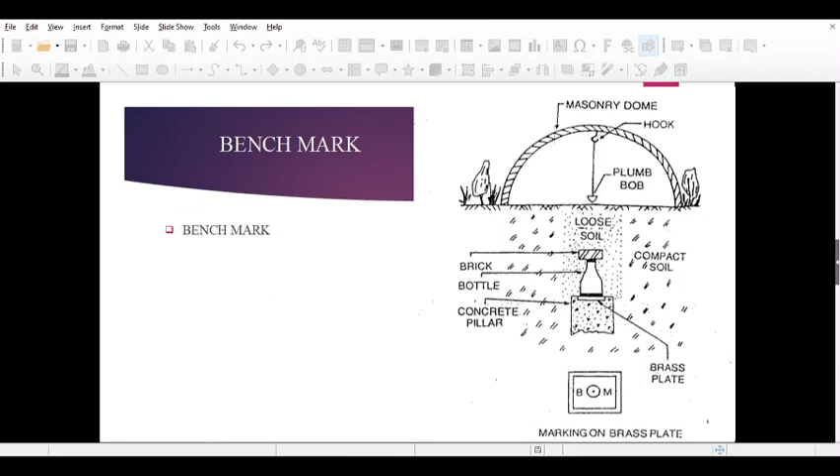You can see here, generally differential leveling is used for vertical control. Generally, the maximum closing error is limited to 24 times the length of the circuit in kilometers to the power half. A primary level route is first established, then a secondary level route is tied to the primary route. The secondary level route normally follows the traverse lines, and the traverse stations can be used as benchmarks.

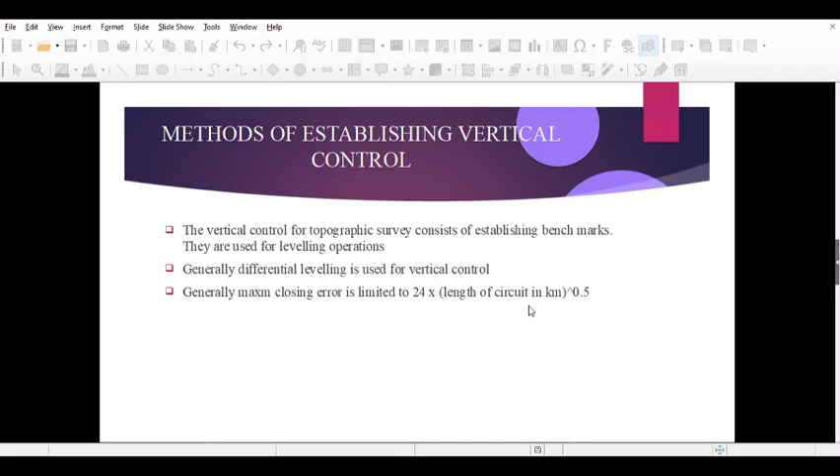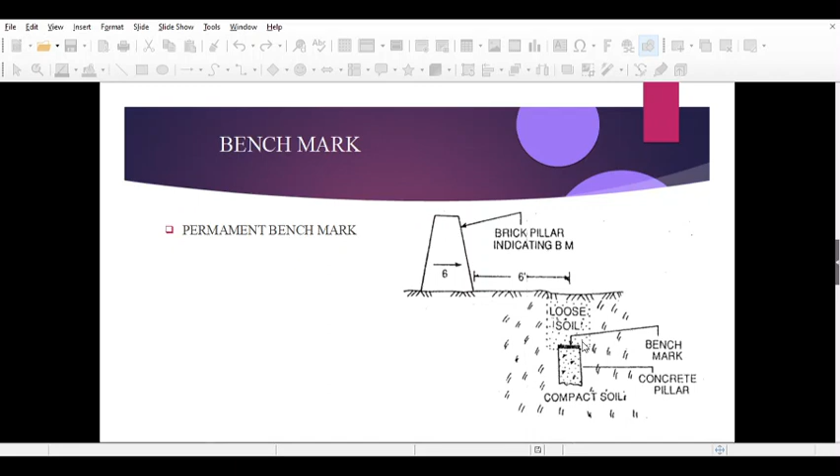Number three is the arbitrary benchmark. Generally, when the RL of some fixed points is assumed, they are termed arbitrary benchmarks. Generally, arbitrary benchmarks are adopted in small survey operations when only the undulation of the ground surface is required to be determined. That means the arbitrary benchmark is adopted for measuring the undulation of the ground surface in small survey operations.

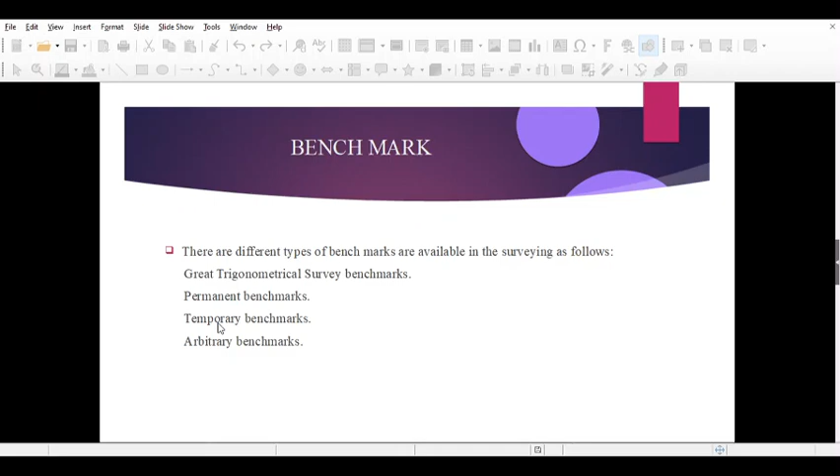At this point, a foresight is taken from one setting and a backsight is taken from the next setting. FS is known as foresight, BS means backsight. Now what is a backsight? This is the first staff reading taken in any setup of the instrument after leveling has been perfectly done. Now what is a foresight? It is the last staff reading in any setup of the instrument and indicates the shifting of the instrument.

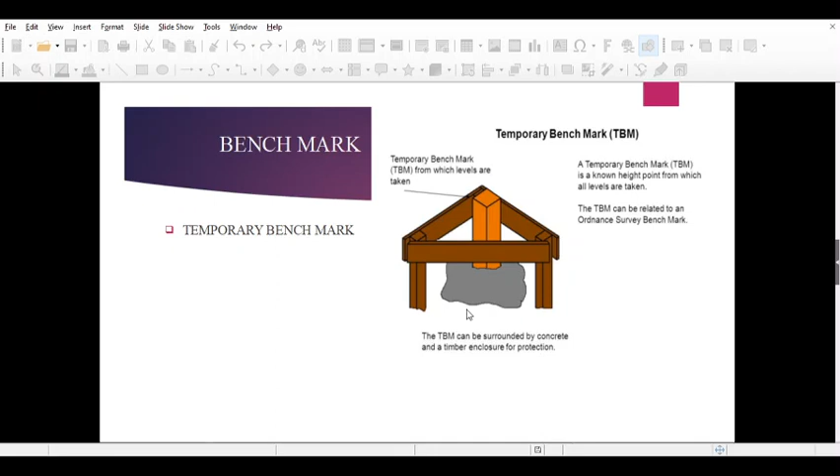Now here is TBM1. Now what is TBM? TBM means, let's see the figure. Here TBM means temporary benchmark. Let's see the figure of benchmark. Here is temporary benchmark. When the benchmarks are established temporarily at the ends of a day's work, it is known as temporary benchmark. Okay.

Now, after discussing differential leveling, you have to know what is leveling. What is leveling? Leveling is nothing but the art of determining the relative heights of different points on the Earth's surface or below the Earth's surface. The leveling deals with measurements in the vertical plane.

Now, what is horizontal line in this context? Any line lying on the horizontal plane is said to be a horizontal line. It is a straight line and tangential to the level line. Okay, this is level line and horizontal line is tangential to the level line.

Now, what is level line? That means this line. Level line is any line lying on a level surface. This line is normal to the plumb line, which is the direction of gravity at all points.

And what is this? This is known as vertical line. The direction indicated by a plumb line or the direction of gravity is known as vertical line. This line is perpendicular to the horizontal line. Horizontal line and vertical line are at 90 degrees to each other, that means they are at right angles.

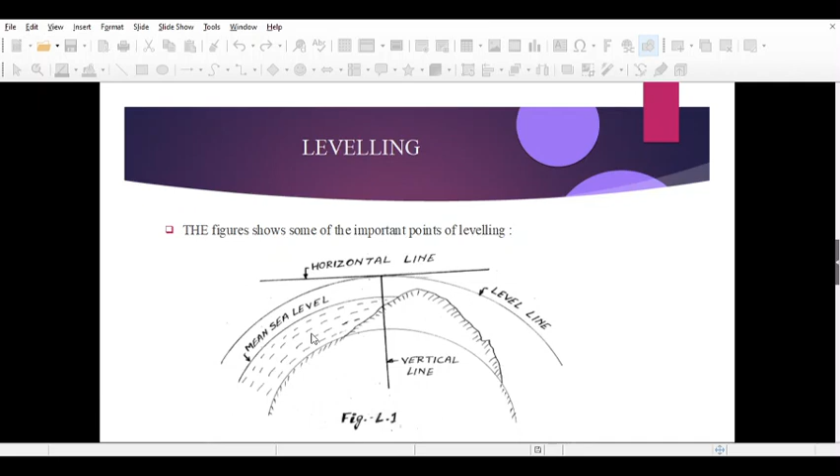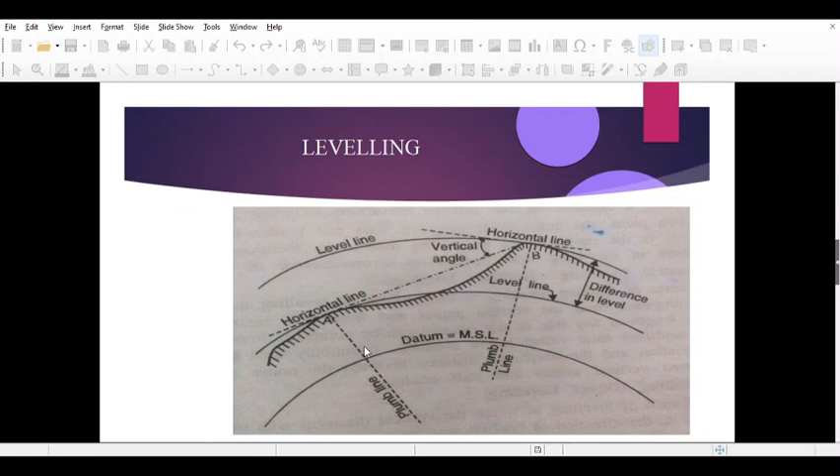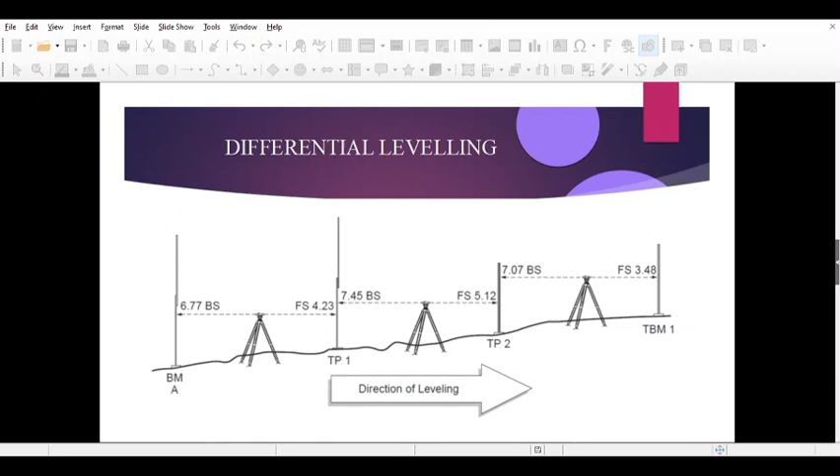Now, while you are doing differential leveling or any leveling, there are some errors which can affect the leveling work, like curvature error, refraction error, combined error. So we have to do the corrections required in leveling. Let's discuss the curvature error.

For long sights, the curvature of Earth affects the staff readings. The line of sight AB is horizontal, and the level line is curved. Here AC is the level line, curved and parallel to the mean spheroidal surface of the Earth. The vertical distance between the line of sight AB and the level line, that is BC, is known as curvature correction.

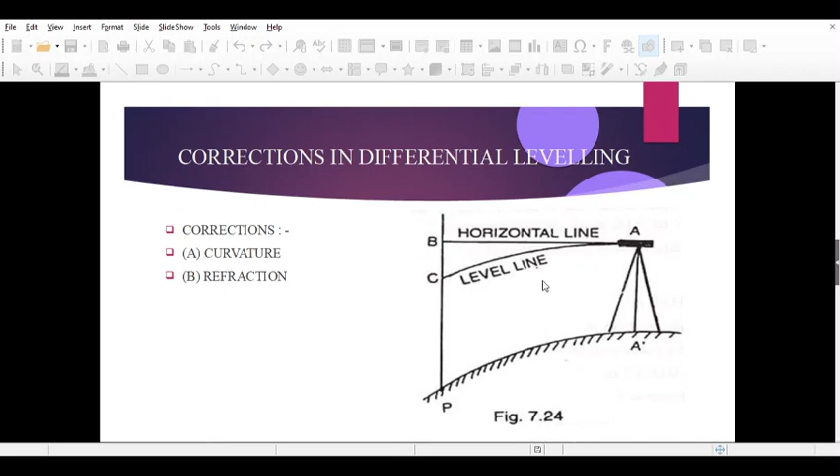The vertical distance between line of sight and the level line at a particular place is known as curvature correction. Due to curvature, objects appear lower than they really are. Let's take a look at the second figure. This is curvature correction, known as CC. This is the line of sight, this is level line, this is the curvature correction.

The formula for curvature correction is derived as follows. Let AB = d = horizontal distance in kilometer, where BD = curvature correction, CC. DC = AC = radius of the earth. Now DD' is the diameter, which is considered as 12,740 kilometer or 12,742 kilometer.

Now from the right angle triangle ABC, height squared plus base squared equals hypotenuse squared, that is BC² = AB² + AC². Here BC is R plus CC, so (R + CC)² = R² + d². By computing this we get CC × 2R = d². Here DD' = 2R, so CC = d²/2R.

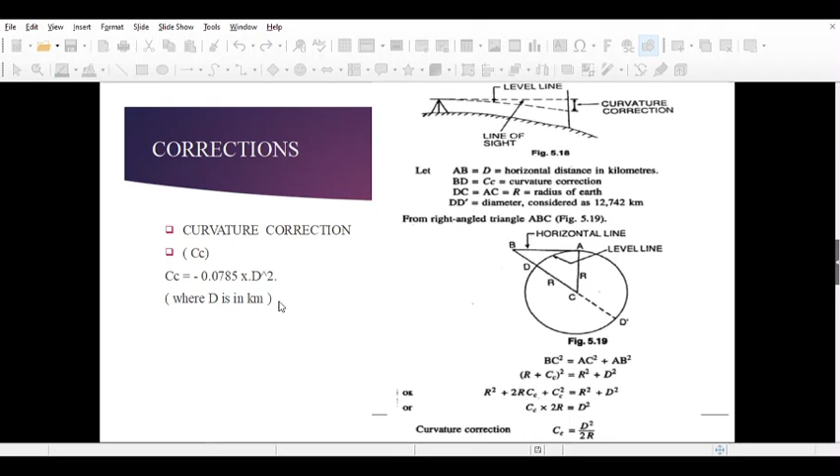Now the second is refraction correction, CR. Rays of light are refracted when they pass through layers of air of varying density. So when long sights are taken, the line of sight is refracted towards the earth's surface in a curved path. The radius of this curve is 7 times that of the earth under normal atmospheric conditions. Generally, the refraction correction is taken as 1/7 of curvature correction.

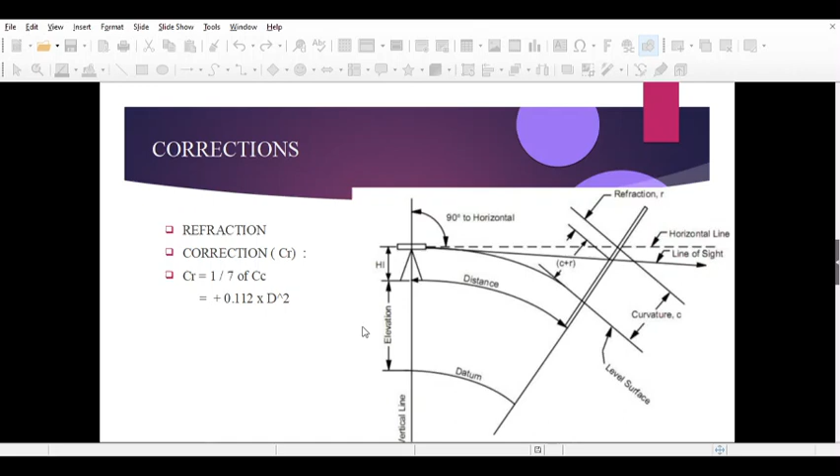That means CC equals 0.0785 d², and CR, the refraction correction, equals 1/7 of CC, that is 0.0112 d². So refraction correction is always positive.